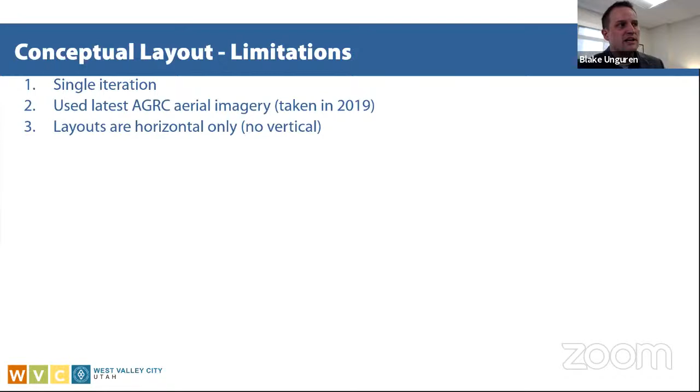These conceptual layouts are looking at a horizontal plane only, which means we did not consider any of the changing topography as you travel along Bangerter, so we did not look at any of the vertical ups and downs along Bangerter Highway. The reason is we do not have a topographical survey of any kind out there, which ultimately will influence the final layouts when you know where the slopes and everything are along the roadway.

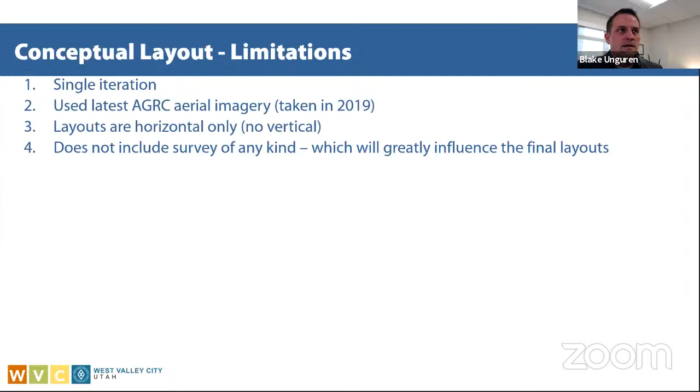Also, we did not evaluate several features that will influence the final alignment or design, including the Jordan Valley Aqueduct water line and its easement. We talked about this last time. This is that 60-inch water line that runs down Bangerter Highway, located in an easement somewhere in the neighborhood of 50 feet wide, maybe a little wider, where structures are not allowed of any kind. So it will need to be avoided, or that easement will need to be relocated altogether. This is the type of thing that takes a lot of time and effort to evaluate and will most likely be considered during the environmental process.

Additionally, we did not evaluate any utilities, and utilities can also influence how the design is laid out. Nor did we look at stormwater drainage, environmental constraints, or anything else like that that could also influence the design.

Therefore, the impacts that we will be reviewing, and the conceptual layouts in the slides to come, are hypothetical and will change as a concept is further refined during the environmental process, as all this information is added to the process that we don't have right now.

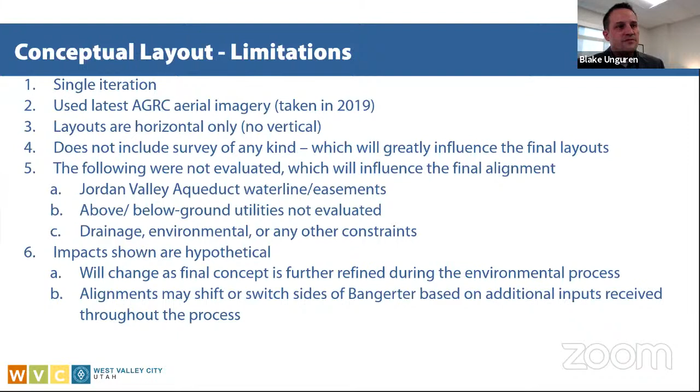I also want to say that the alignment of the layout may shift as well. So we may be showing that this alignment is widening to the west, when at the end of the day it may end up widening to the east. We're making assumptions based on the limited information we have to create the best alignment we can think of with these conceptual layouts. But at the end of the day, when all these other inputs are added, it may change.

So we don't want you to take what we have shown as the gospel truth, but it gives good insight into what that potentially looks like from an impact standpoint.

Finally, I want to let you know that the SR 201 interchange concept is an unknown right now. We did not lay out anything from 2400 South to 201, as that final interchange layout will greatly influence what's occurring between 2400 South and SR 201. We didn't go into that area for that reason, and it'll flesh itself out as UDOT continues to figure out what concept they want to implement up there. So those are some of the limitations with what we've done.

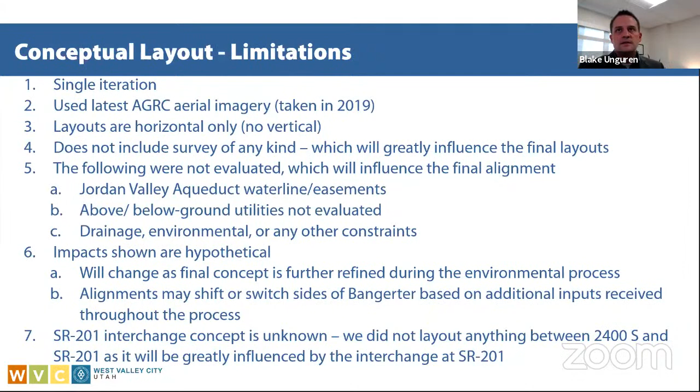Now let's spend a little time reviewing the conceptual layouts for the three options we looked at. I'll walk us through the study area starting on the southern end, the segment between 4100 South and 3500 South. North is up on the map, and this legend will help orient you as we look through the map.

This lighter gray area is the roadway at grade, so no overpasses or anything like that. When you see the darker gray area on the map, typically at these crossing streets, those are the bridges or overpasses for the freeway systems. The light yellow areas represent potential partial property acquisitions, just partial. The red highlighted areas represent potential full property acquisitions. And again, I use the word potential - I'll probably use that a lot throughout this discussion because these are hypothetical based on the limited information that we have.

They're hypothetical. The good thing about this is that these conceptual layouts will help us understand what the impacts could potentially look like, but there's a good chance they will change from what we're showing today.

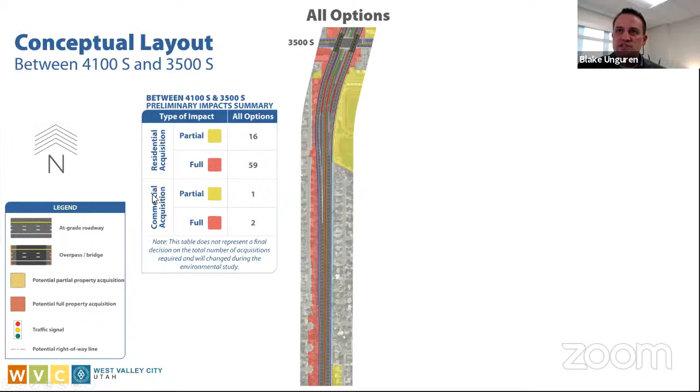With that in mind, here is a summary of potential impacts between 4100 South and 3500 South. Just to orient you with this table, we've summarized these impacts into residential acquisitions and commercial acquisitions down here on the bottom, with partial and full categories for both. I want to let you know that for commercial acquisitions we took some liberties—we said anything that was not residential is commercial, so the golf course and any parks are included in that commercial acquisition, even though they'd probably be identified as a different type of acquisition.

So as you can see here, in this segment between 3500 South and 4100 South, we are seeing 59 potential residential acquisitions in this area because of the widening from the freeway system.

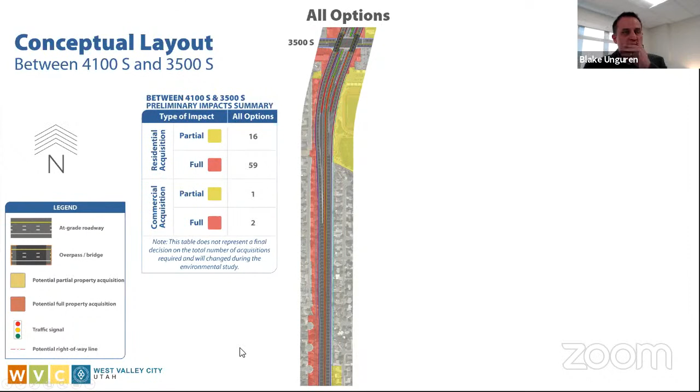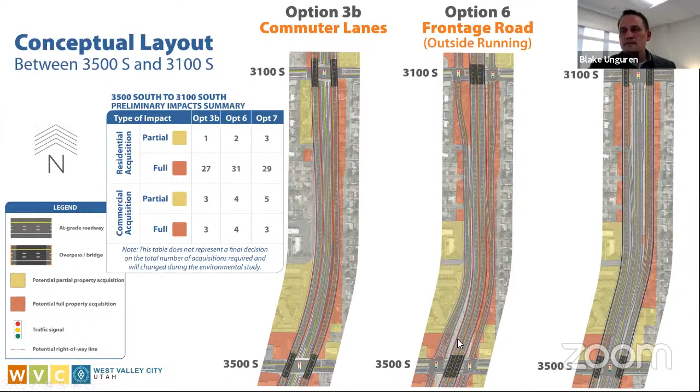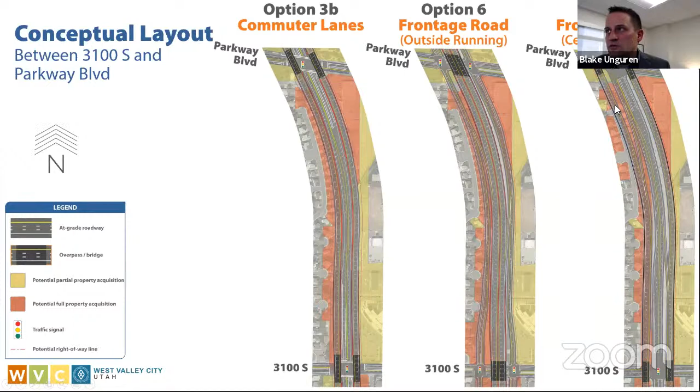And so as you look at the impacts, you'll actually see additional impacts in option 7 as opposed to option 6, and then the least amount of impacts in option 3B. As I mentioned before, these on and off ramps in option 6 and 7 could potentially require additional width beyond option 3B. However, option 3B could still potentially require a similar number of property acquisitions to accommodate its footprint, or its total width, as you can see here, much like options 6 and 7.

So even though options 6 and 7 have a wider footprint, a large portion of that footprint could still fit within the impact area of option 3B. As you see along this western edge here, these footprints are utilizing a lot of that property that would be required for option 3B. That's why you don't see a huge change in impacts from option 3B to 6 and 7 — it's because of the nature of the width of these footprints.

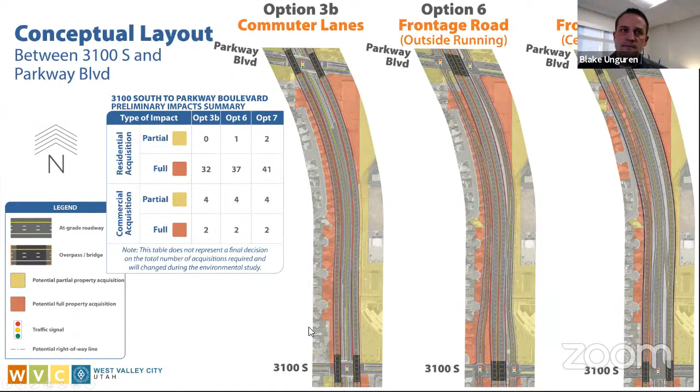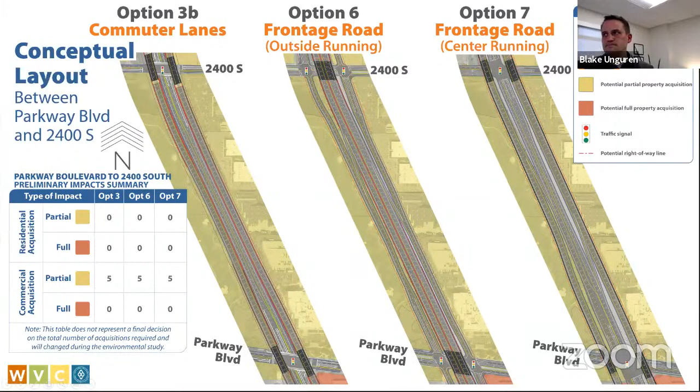As this is our final meeting with you, I wanted to walk through a quick summary of how the objectives lined up for each of these options. The objectives we talked about earlier are focused on impacts and mobility, where mobility was looking at providing connectivity and reducing congestion. Let's see here if I can get this to advance.